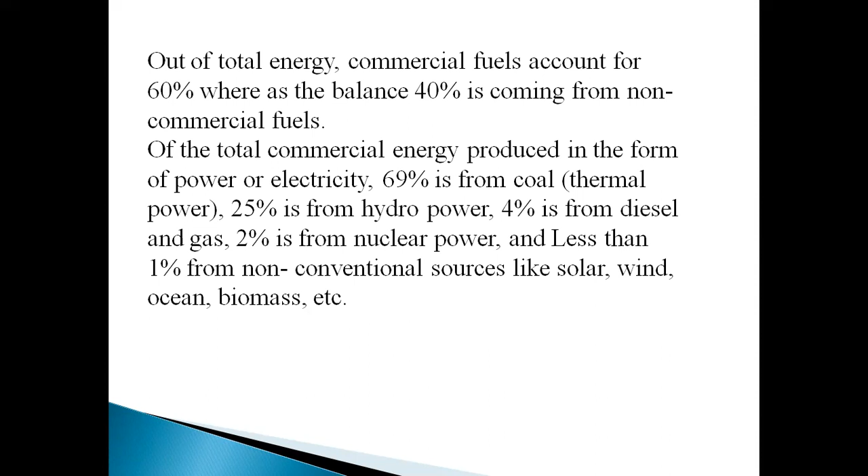Petroleum and its products are the other large sources of energy. In a developing country like India, in spite of enhanced energy production, there is still a shortage due to increased demand of energy. In spite of the phenomenal increase in power generating capacity, there is still a 30% deficit of about 2000 million units.

Hence, the policymakers are in the process of formulating an energy policy with the objectives of first, ensuring adequate energy supply at a minimum cost; achieving self-sufficiency in energy supplies; and protecting environment from adverse impact of utilizing energy resources in an injudicious manner. So why is there a need to make policies?

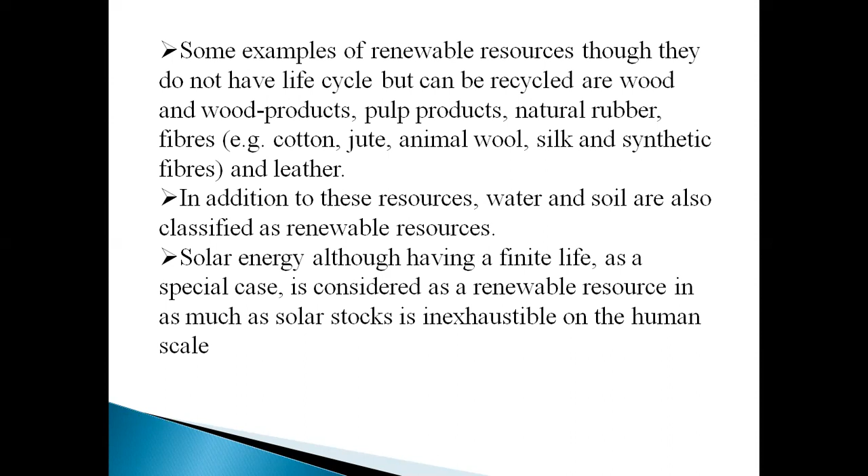Now, non-renewable resources. Again, the term itself defines that these are resources which cannot be replenished or renewed in a very short period of time. Resources that cannot be replenished through natural processes are known as non-renewable resources. These are available in limited amounts which cannot be increased. These resources include fossil fuels, for example petrol and coal; nuclear energy sources, example uranium, thorium, etc.; metals like iron, copper, gold, silver, lead, zinc; and minerals and salts like carbonates, phosphates, and nitrates.

Once a renewable resource gets converted into a non-renewable resource and if it is consumed, it is gone forever. Then we have to find a substitute for it or do without it. Non-renewable resources can further be divided into two categories: recyclable and non-recyclable resources.

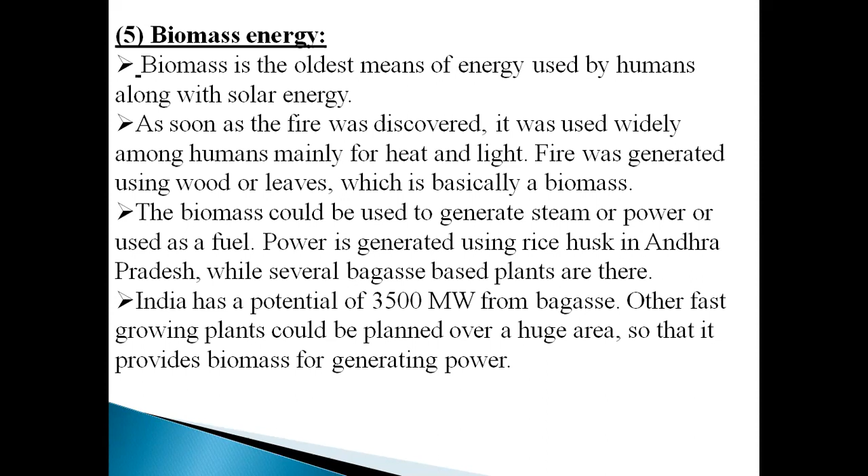Organic waste such as dead plants and animal materials, animal dung, and kitchen waste can be converted by the process of anaerobic digestion or by the process of fermentation into a gaseous fuel, also called biogas. Biogas is a mixture of 65% methane and 35% carbon dioxide, and may have a very small amount of hydrogen sulfide, moisture, and siloxanes. It is a renewable energy resulting from biomass.

Biogas can be used as a fuel in any country for any heating purpose, such as cooking. It can also be used in anaerobic digesters where it is typically used in a gas engine to convert the energy in the gas into electricity and heat. Biogas can be compressed much like natural gas and used to power motor vehicles.

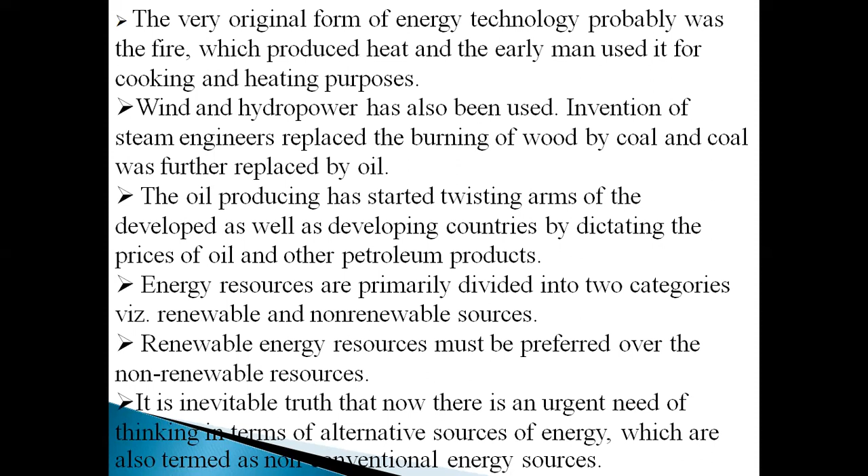Energy resources are primarily divided into two categories: renewable and non-renewable sources. Renewable energy resources must be preferred over non-renewable resources. It is an inevitable truth that there is now an urgent need of thinking in terms of alternative sources of energy, which are also termed non-conventional energy sources.

It is an unavoidable truth that there is now an urgent need of thinking in terms of alternative sources of energy, which are also termed non-conventional energy sources. These include solar energy—needing equipment such as solar heat collectors, solar cells, solar cookers, solar water heaters, solar furnaces, and solar power plants—wind energy, hydropower, tidal energy, ocean thermal energy, geothermal energy, biomass, biogas, biofuels, etc. The non-renewable energy sources include coal, petroleum, natural gas, and nuclear energy.

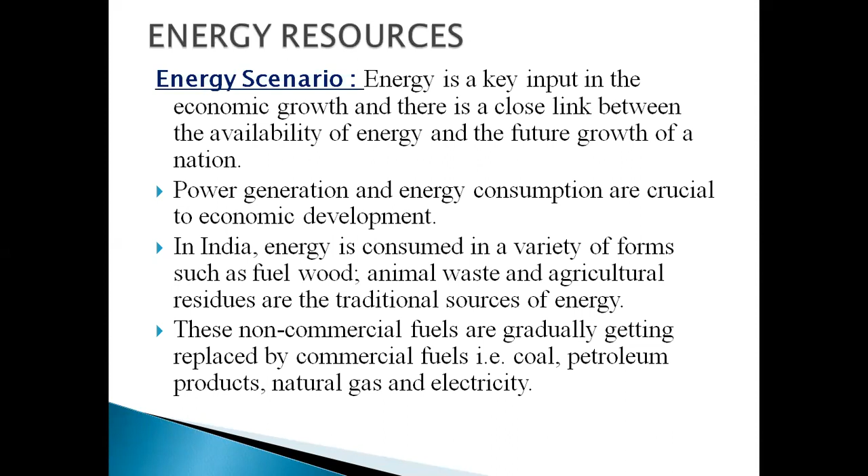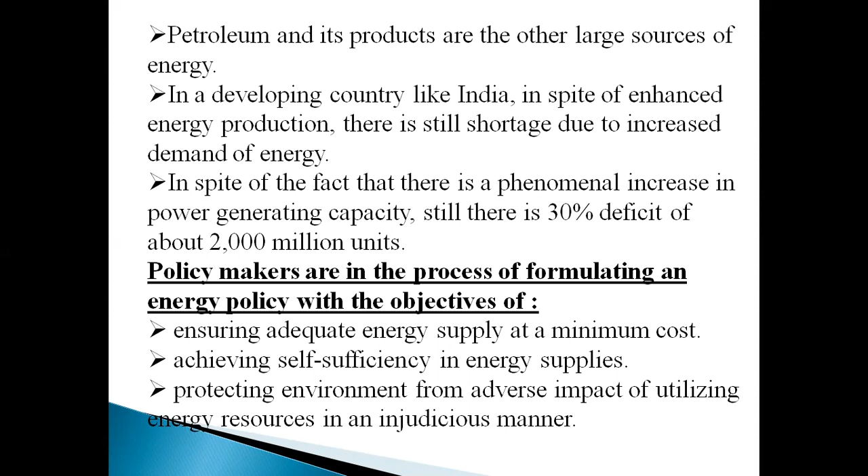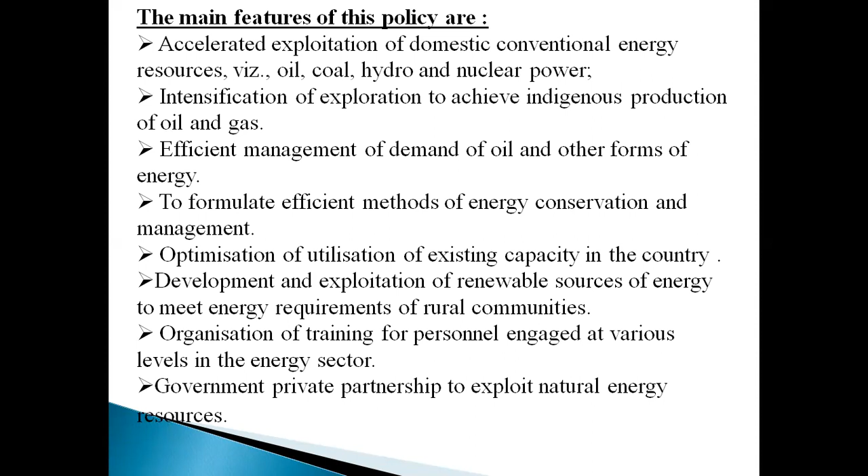So let's have a quick recap of what we have covered in this portion of Unit 3, Natural Resources, under energy resources. First, we studied the energy scenario. After that, we studied various policies, why there is a need to formulate them, what are the objectives behind these policies, the features of these policies, and the motto behind them.

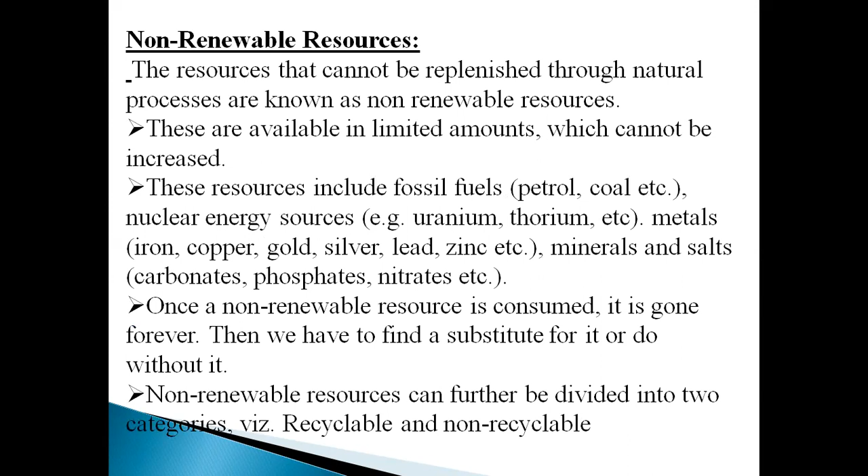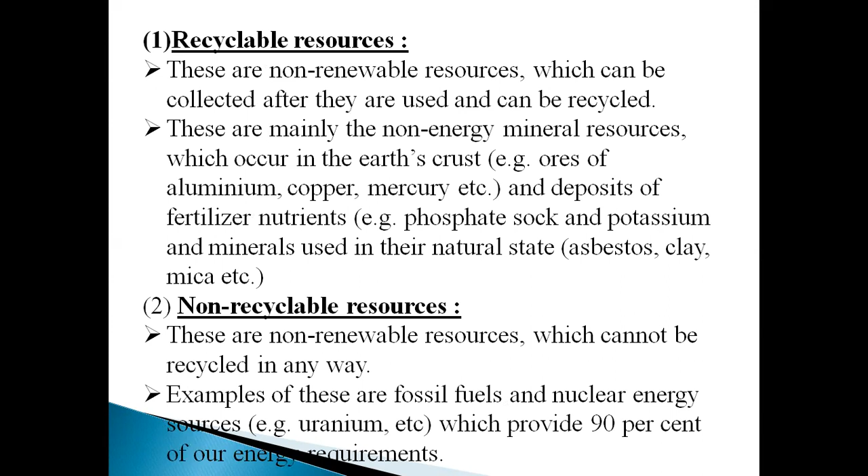Then we studied the renewable resources of energy, the non-renewable resources of energy, and discussed recyclable and non-recyclable resources. Then we studied the use of alternate energy resources and why there is a need to find alternatives to these energy resources.

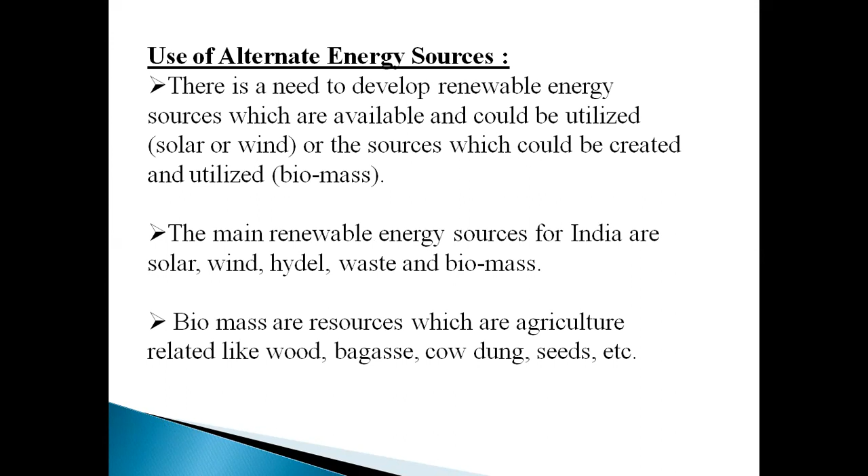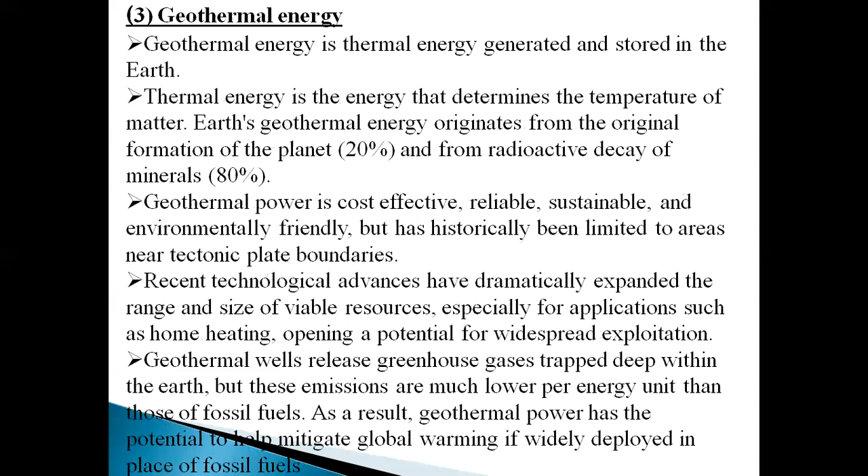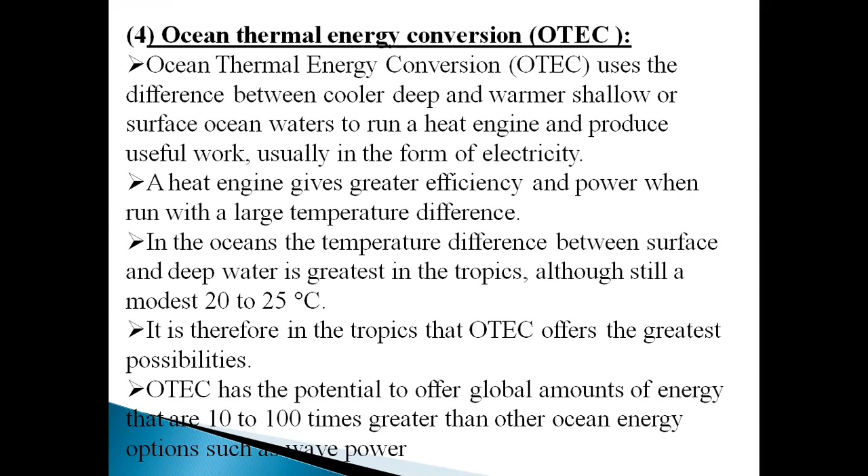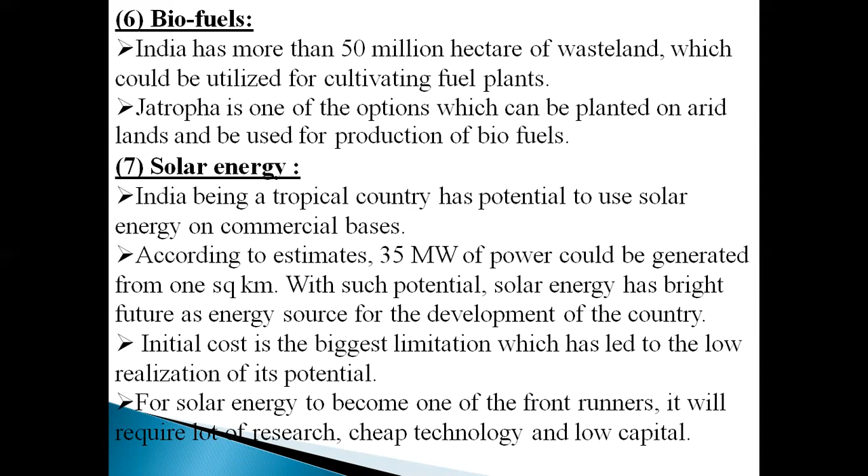In the alternative sources of energy, we studied first hydel energy, second wind energy, third geothermal energy, fourth ocean thermal energy conversion, also known as OTEC, then biomass energy, biofuel energy, and solar energy.

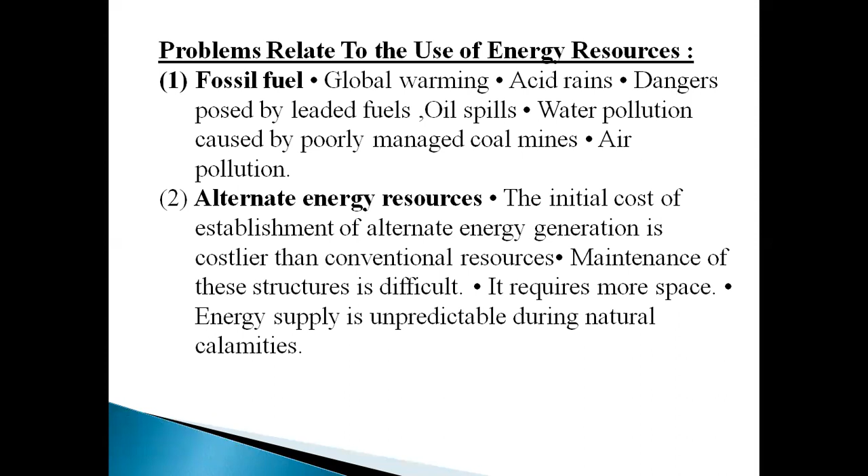After that, we studied the problems related to the use of energy resources, going through various kinds of fossil fuels and alternate energy resources. Then we discussed the growing energy needs.

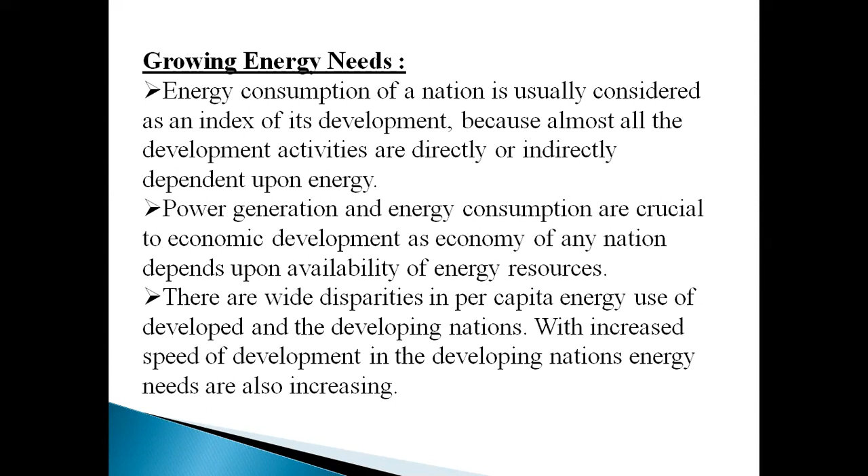Now, in the next part of this lecture, we will discuss a few case studies which are related to various natural resources. Thank you.